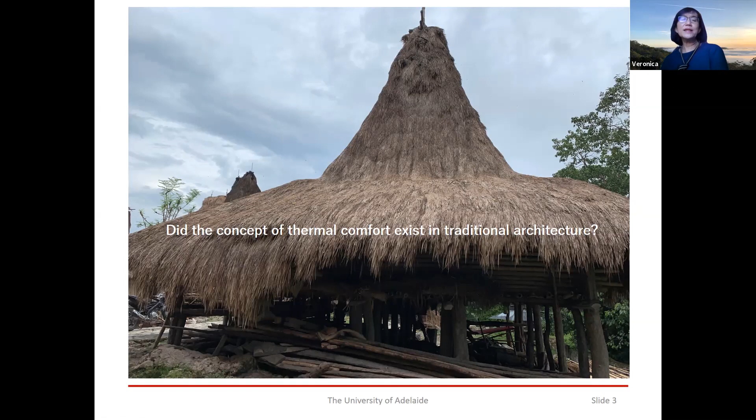Yes, yes. Yeah. So despite the fact that we often read that people who did vernacular architecture understand that, is that really the same understanding of thermal comfort that we understand now, or is it something else? For example, we know that in some traditional buildings, yes, they do build with very light material to probably allow the air to go through. But very often what we see is the windows are very small.

So, and then you go in there, and this was not my photo, but I remember last year I went to Flores and Sumba as well. And we went to some of the traditional houses, and inside the building actually is quite stuffy, sumpah.

And we do wonder, or I did wonder, how did they cope when they felt hot? And often what they do, they just go outside. They'd be in the shade, they just sit among plants and so on. So it's not often the case that the building would provide comfort as we know it now, because there are other ways for them to feel comfortable.

So the notion of thermal comfort that we know now, where a building has to provide this comfortable condition all the time, I don't think it's really the case. It may happen sometimes, but again, people don't necessarily live inside. They go outside. In some cases, yes, they have windows open to have the air go through, but it's not always the case. And you see that in many, many traditional buildings, even in Indonesia.

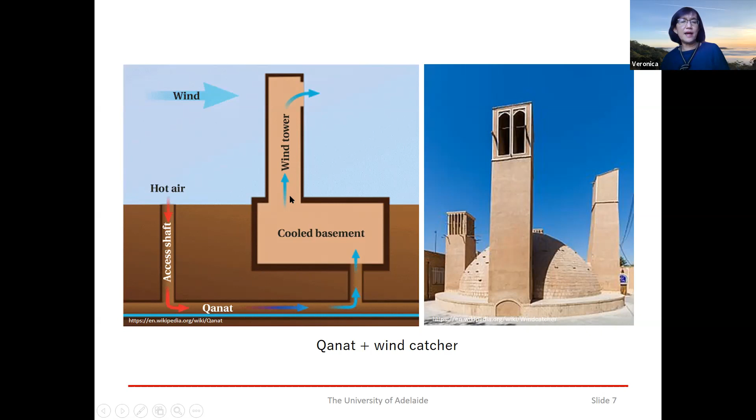They bring in the hot air, and then they put something like an evaporative pad, like a wet pad or wet mat. So then the air would go through this and bring cool air into the building. So yeah, some traditional buildings do that. But again, sometimes in areas that can get cool, they light a fire. So then the fire brings warmth to the people, and it brings so-called comfort to the people.

So in a way, there are several ways for us to be comfortable. Either we move to another place, like the photo that I mentioned before. Or we regulate the rate of our internal heat generation. So if you feel cold, then you drink a hot drink. Or if you feel warm, then you have cold drinks. Or we increase or decrease activities to regulate the rate of heat coming to the body, or regulate how much heat is lost to the surroundings.

So once again, we change clothing when we feel too hot. We take off our clothes, let the sweat on our skin evaporate, and then we feel cooler and so on. Or sometimes our body would contract, like when we feel cold, we become a bit tense. We increase the muscle tension to create this energy, the heat inside the body.

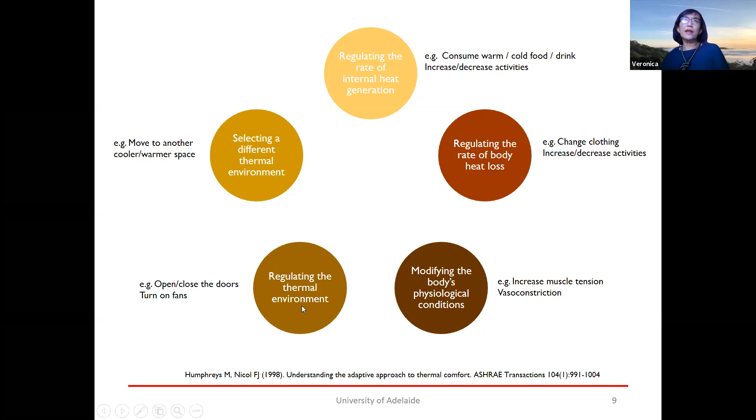However, the concept of thermal comfort as we use it now, which is providing a thermally comfortable condition in a building for the people all the time, really was a 20th century invention. It wasn't something that a traditional building would provide, this comfort 24 hours a day, 7 days a week.

Can anybody answer, when did the concept of thermal comfort, as we use it now, start? When did the demand for thermal comfort really start? Anybody want to answer that?

Anybody knows? Can take a guess? Yes? Who's answering that? Oh, Pak Sadili. Selamat pagi, Pak. When did it start? When do you think it started? Okay, to save time, I'm not going to wait any longer.

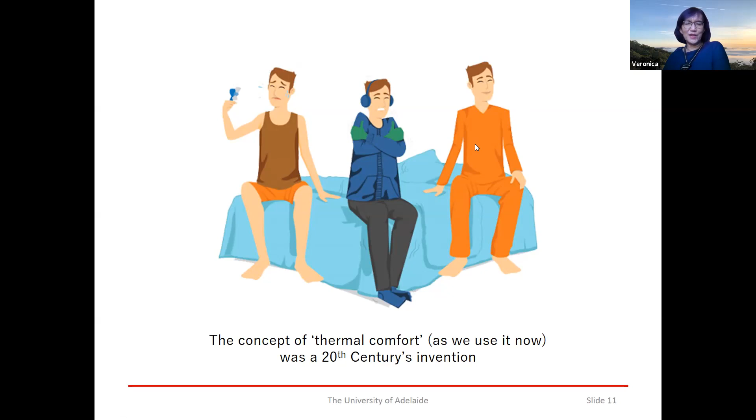So this thermal comfort, as defined by ASHRAE, or the American Society of Heating, Refrigerating, Air Conditioning, also by ANSI standard, the national standard, is basically understood as the condition of mind that expresses satisfaction with the thermal environment, and is often assessed by subjective evaluation. So subjective evaluation is, we said, oh, we're too hot or too cold or slightly cool or slightly warm. But it's a condition that we say we're satisfied with the thermal environment.

Whereas in a traditional building, people are probably not necessarily satisfied all the time, but they just go outside. They do something else to make them feel comfortable. So when did it actually start? It actually started by this guy back in 1902. So this is Willis Carrier. The notion of thermal comfort that we know now, that building has to provide a thermally comfortable condition for the occupants all the time, started off with the invention of air conditioning.

And it really began with a printing company. So this is really interesting. It's a printing company in New York. They found that the humidity in the Brooklyn plant ruined the color register on the ink. So the ink, when applied to the paper, misaligned. So it doesn't match with what they want to print because the humidity ruined the paper.

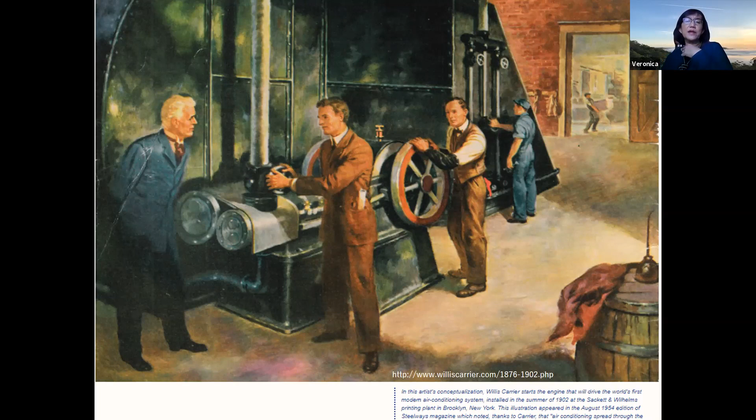So I'm not going to go through, of course, the big invention that he did, but basically it changed the world. It started off by affecting the printing company. This image shows that the printing got better once the factory got air conditioned. But that invention then started to spread very quickly. And this image, from Carrier's website, says air conditioning led directly to summer movie blockbusters as people came to cooled theaters to escape the heat.

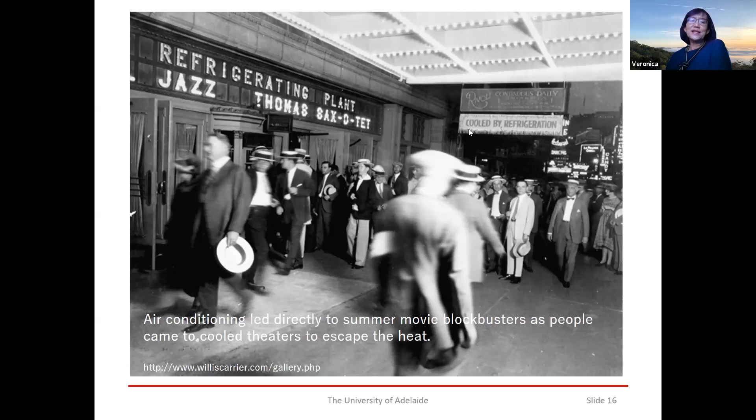So this is summer, but look, these people are wearing jackets and hats and coats because they're going to a refrigerating plant. It's like they're going to a refrigerator because it's so cold. And that's what people then demanded. So it says cooled by refrigeration. And since then, because we knew how to control the environment, we started demanding to be thermally comfortable inside the building, not just go outside. We need to be comfortable inside the building. So people demand to be thermally comfortable, and it has become a commodity.

However, although you can tell that I've got a cynical view about this air conditioning invention, Carrier developed something really, really important, what we now call the psychrometric chart. I'm not sure if those of you who learned building physics were exposed to the psychrometric chart. Basically, it's a chart that shows the relationship of things that relate to air: the dry bulb temperature, which is the temperature that we measure with a thermometer, the amount of humidity or moisture in the air, sometimes expressed as absolute humidity or relative humidity.

And often this is what we say a lot. Relative humidity in Indonesia is often between 70 to 100%. So 100% is a very humid condition. And so the lines here are the relative humidity lines. This is the line of the temperature. And bear with me why I show this, because this is going to lead to what we'll talk about later, building performance. So for example, what does it mean?

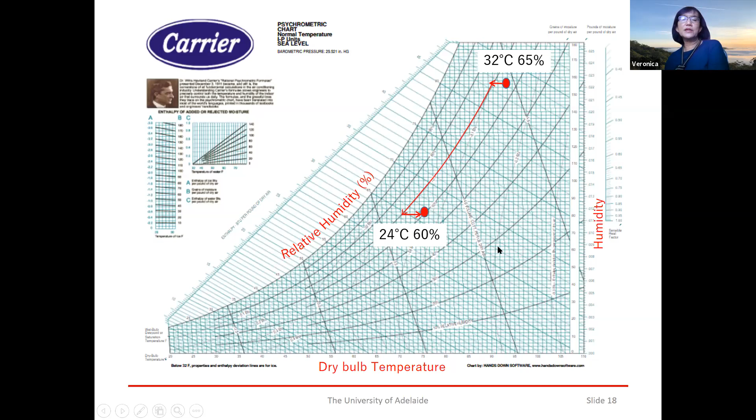So basically the principle is often, particularly in the hot humid climate, what we will do is we dehumidify the air, and at the same time, we do the sensible cooling. So the sensible cooling goes this way, horizontal, and then dehumidification goes this way. Or sometimes it goes this way. If you go this way, you increase the temperature, because going right is increasing the temperature, going left is decreasing the temperature. So just keep that in mind for a while and why I'm showing this.

Okay. Now let's wind 30 years later. There's a guy named Gagge who was interested in the relationship between human body and environment. And basically Gagge said that to maintain the internal body temperature of 37 degrees, what we do is we need to have the heat coming to the body, and the heat can be from our activity, or it could be from the food that we take.

So we create energy in our body, but at the same time, we also lose the heat. So we can lose it through our respiratory system. So when we breathe out air, we basically lose some heat. We also can lose body heat through our skin, when we're sweating, by evaporation, or simply if our body temperature is higher than the surrounding environment, then we lose the heat. But our body basically tries to balance this, and we need to maintain this condition.

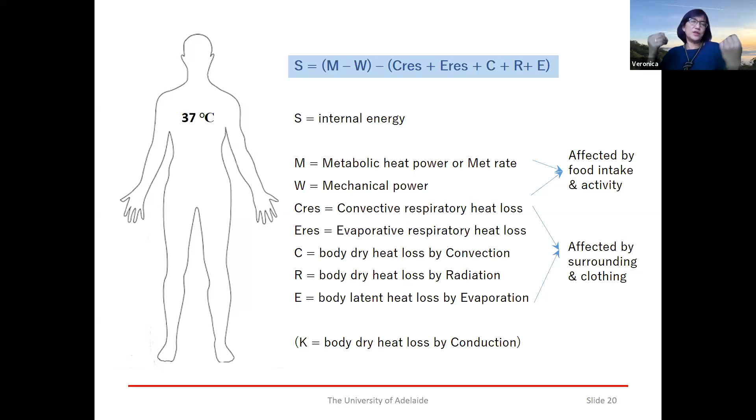So what happened is, these two, as I mentioned, are affected by food intake or activity, whereas these can be affected by our surrounding or our clothing. So when the surrounding is cooler than our body, we would lose heat. But if we don't want to lose that heat, let's say we are in a cool environment, then we put on a lot of clothing, right? So we reduce the heat loss.

What this says basically is these are the factors that affect thermal comfort. So our activity, our clothing, and then these four factors: temperature, humidity, radiant temperature, and air movement. For example, again, if it's warmer surrounding our body, we will have the heat coming into the body. And to make sure that we don't overheat our body, we release that heat through evaporation, through sweating, and so on.

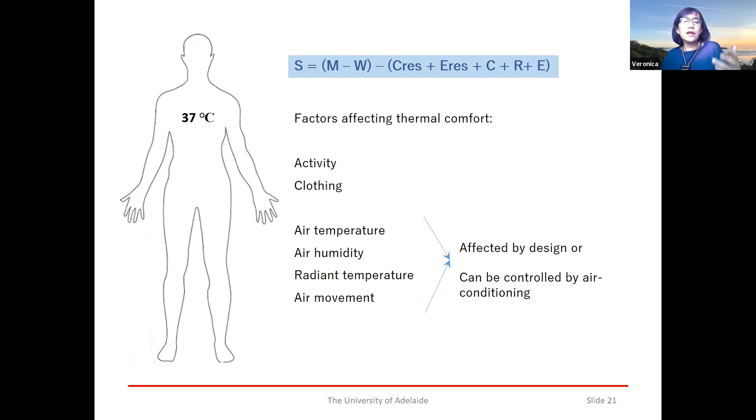As a designer, this is what we can do. We can't really control what people do in a building. We can't really control what people wear. It's up to them. But as a designer, we can affect this through our design, or in the case of Carrier, he created air conditioning to control the temperature.

Let's wind several years after, and I'm sure some of you are smiling looking at this photo. It's okay. Then this guy came along. His name is Fanger, or Povl Ole Fanger. He's a Danish scientist. And he was studying the relationship between the physical parameters of environment, as well as the physiological parameters of people, as well as perception and well-being. So what he did is he had 128 college students as participants, and he did a study in a climatic chamber where he can control the environment.

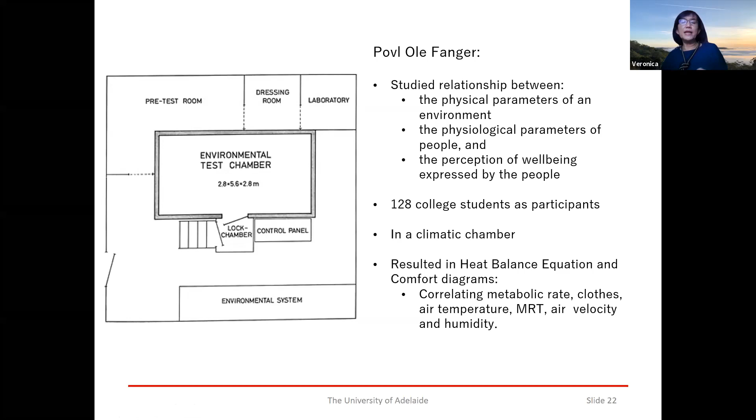And what he did was he varied all those parameters. He varied people's activity, clothing. He asked people to wear thick clothing to almost nothing at all. He varied the air temperature, humidity, radiant temperature, as well as the airspeed. And he basically asked people to answer questions such as, do you feel cold? Do you feel hot? Do you feel okay? And so on. And then he found out how to correlate all of these factors, which really becomes the standard now that we use in thermal comfort.

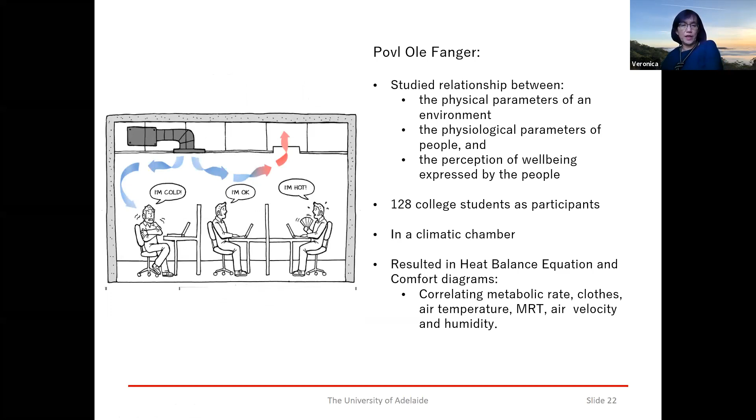One thing that he developed is something called PMV. PMV is predicted mean vote. Don't worry about the equation. I don't even do this myself because there is a program that can do it. But basically, what it says here is he found that people tend to prefer to be between slightly cool to slightly warm. So he asked questions on this scale from hot to cold.

And then this is what he called the neutral condition. And this is what the study found that people were after. So predicted mean vote is the prediction of how people are going to vote on this scale. And he found that between minus 0.5 to 0.5 is what people are after. The other thing that he developed is something called PPD, or percentage of people dissatisfied.

So whilst PMV is saying how cool or how hot they are, this is expressing how many % of people are dissatisfied in that condition. So as you can see here, this is the PMV vote on the bottom, and this is % of people dissatisfied. So as you can see, when people vote between minus 0.5 and 0.5, which is slightly cool to slightly warm, the percentage of people dissatisfied with that condition is only 10%. In other words, 90% of people are satisfied.

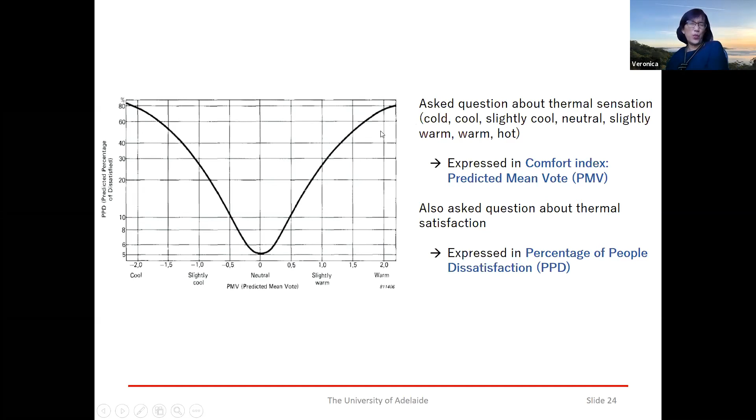And the further you go from the neutral condition, the more people feel dissatisfied. And he found that 80% of the population would be dissatisfied when they feel cool or warm. So that's pretty much what he found.

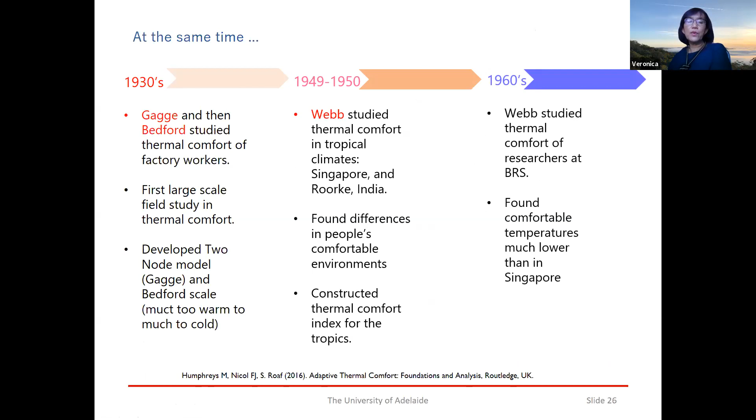However, at the same time, there were other studies. So for example, Webb looked at thermal comfort studies in the tropical climate and compared them with studies in other countries. He looked at studies in the UK and found that thermal comfort in Singapore or in India is quite different than thermal comfort in the UK. So this is the result that he found.

So on the left here are studies in England or the UK, okay? The English studies are right here. On the right-hand side here are studies in Roorkee, India, the plus signs, and in Baghdad, and this is Singapore. So these are all the hot climates, hot humid, and then the cold climate.

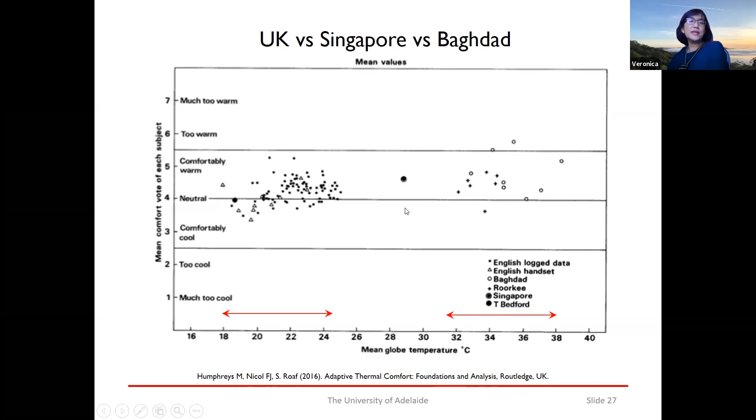Have a look at the range of temperature. So in England, this is the range of temperature that people feel acceptable when they feel neutral, or between comfortably warm and comfortably cool. In the tropics and the hot climates, look at the range of temperature, between 32 and 37. And in Singapore, it's about 29 degrees. So is thermal comfort universal? I don't think so.

So that study basically led to several more studies. Humphreys, for example, looked at what we call the adaptive feedback, and found that the outdoor temperature actually affects how we feel indoors. So when we expect it to be warmer, such as in the tropics or in a hot climate, we can actually accept a warmer condition. Whereas people in a cooler climate, or people in an air-conditioned building, if they expect to be in a cooler climate, tend to accept conditions at much lower temperatures.

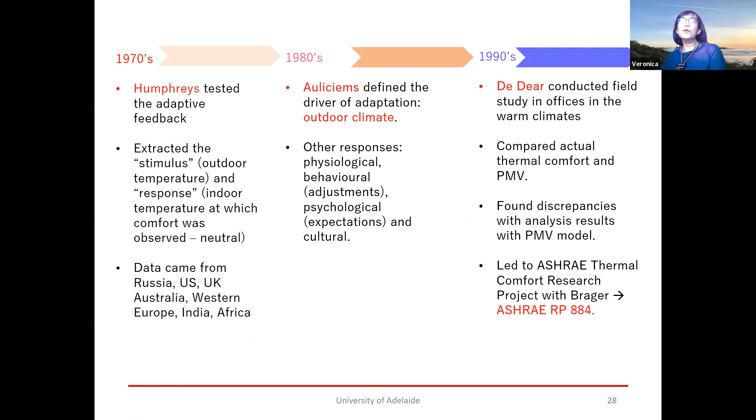Auliciems also found the same, and our researcher, my colleague in Sydney, or at the time he was in Queensland, Richard de Dear, did more studies looking at all the data, which led to what we call adaptive comfort. So what they found is something like this. If you look at the clear circles here, this is basically, again, the condition that people found to be neutral in non-free running buildings. Free running buildings are basically naturally ventilated buildings.

And have a look at this. So this is the result in naturally ventilated buildings, or buildings without air conditioning: when the outdoor is 10 degrees, people can accept temperatures as low as 16 degrees. And when the outdoor is 34 degrees, they can accept conditions up to 30 degrees.

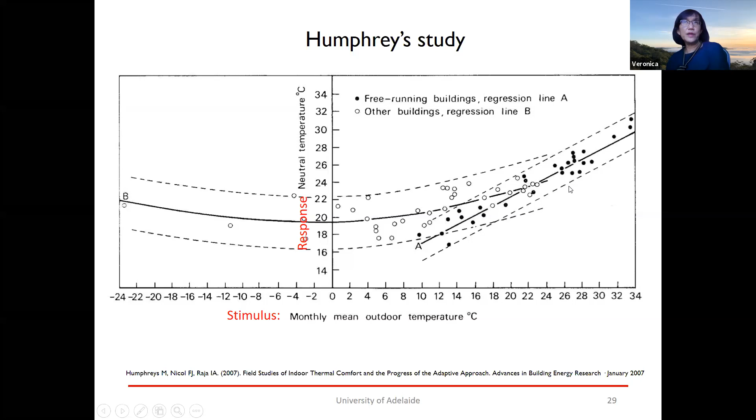Whereas if you are in an air-conditioned building, it stops here. The comfort stops at 24 degrees. Above that, people start to feel it's warm. It's not acceptable. And it's really interesting when you compare what they found comfortable indoors compared to the outdoors. So this is in an air-conditioned building.

Whether it's hot outside or cool outside, the range of comfortable temperature inside the building is only between 22.5 to 25 degrees, very narrow. In the naturally ventilated building, we can tolerate from even 20 degrees, but even less, 16 degrees to more than 27 degrees.

So that really says that there's two different standards that we can apply in buildings. One, if you are in an air conditioned building, which tends to reduce the range of acceptable temperature. And when you are not in an air conditioned building, you actually can tolerate more.

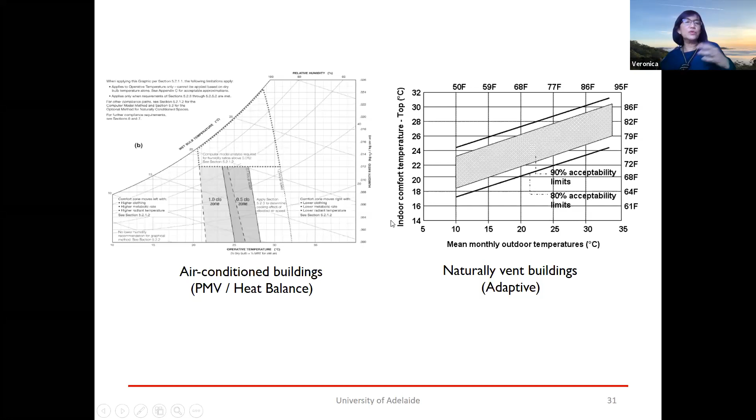So in the lecture last week, although we talked about socially sustainable architecture, in the context of sustainable architecture, I guess you know the answer, right? So if you're going to look at how we can make the building comfortable, then don't close it off, because if you close it off and put air conditioning, then people would expect to be in that condition. And when you are in that condition, you don't want to be too warm, and the building would use a lot more energy.

So in summary, thermal comfort really can vary between people, populations, groups, even older and younger can be different. And it varies between people in air conditioned and non air conditioned buildings, but really needs to be understood and assessed before you design a building for those people. So how can our design provide thermal comfort, and how can we assess this?

Now, this is going to get to the core of the lecture, and sorry to spend a lot of time before, but I think to give that context is very important. I'm going to start actually with the actual existing building first, and then we go back to the design and design process and using building performance modeling to do that.

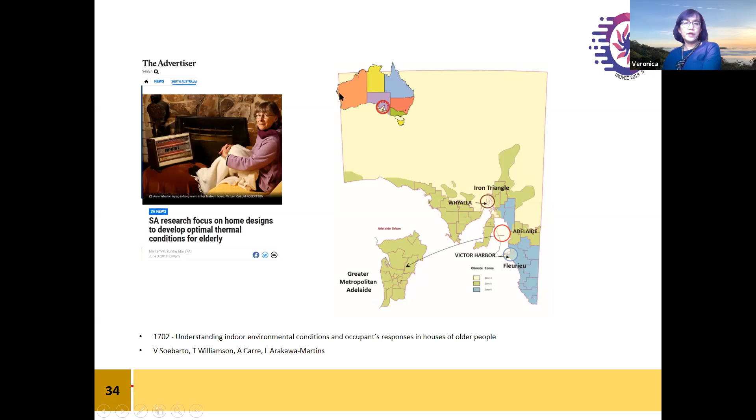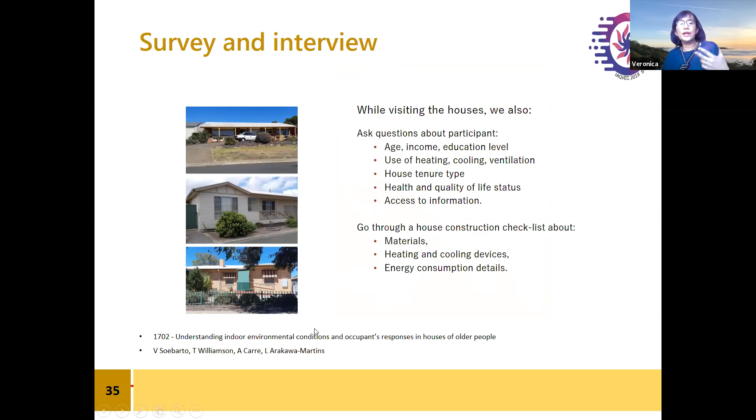Just an example. So we are just finishing a study looking at the thermal comfort of people over 65 years old in South Australia, where we go to the house, we do interviews, we did a little bit of what we talked about last week, looking at the social aspect of sustainable architecture, looking at their demographics and so on. But at the same time, we're also looking at the building design, heating, cooling devices, and so on. In the context of this lecture, it's relevant to show what we did.

So we did the thermal comfort survey basically. We developed our own data monitoring devices, and then people answer the questions about how they feel using this tablet. The tablet communicated with the data loggers, so we know at what condition they answer the question. So we know the temperature, humidity, airspeed, and radiant temperature at the time.

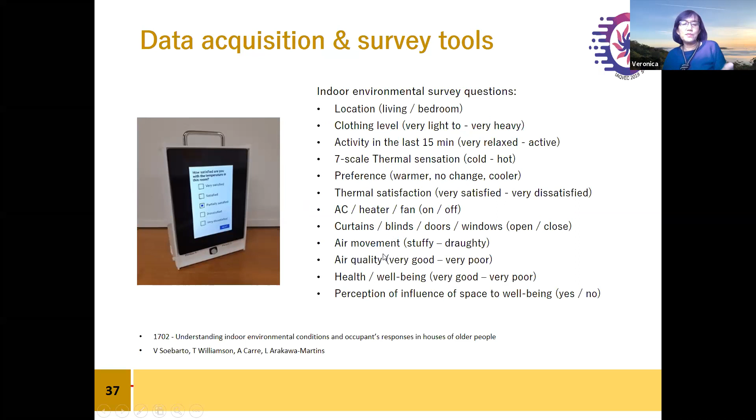And then we ask questions about what sort of clothing they are wearing, activity, their sensation, do they want to be cooler, warmer, and so on, whether they're satisfied or not, whether the air conditioning is running, curtains open, and so on and so forth. And we also ask about their health and well-being. So the benefit of doing the study is to really confirm what people experience.

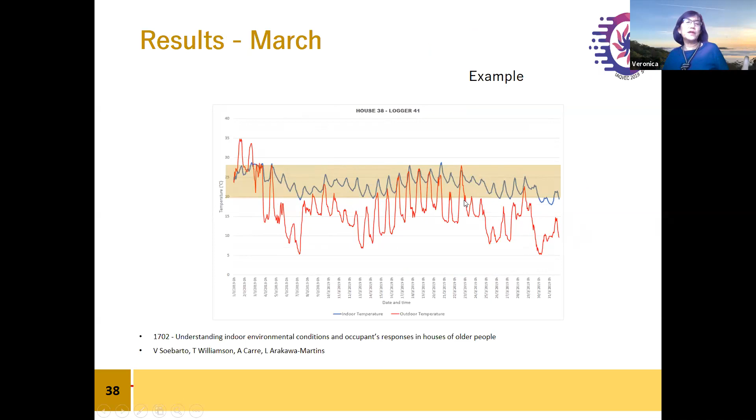So as you can see here, the red line is the outdoor temperature, and we found in this particular house, the temperature inside the house in March, which is a bit warm, is within that comfort boundary that we looked at before. So with this, we can also look at when they answered the question. So this is the temperature at the time they answered the question. We also can see when they answered the question.

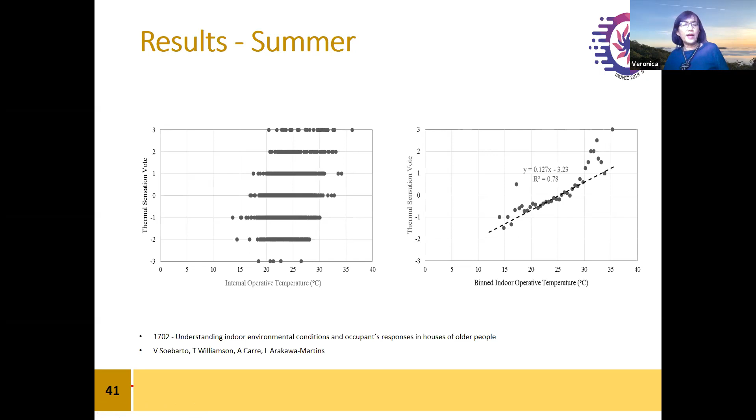So to represent the data, we can put that in the plot as we showed before, which is looking at the thermal comfort, and we can look at the range of conditions when it is inside or outside the thermal comfort zone, or we can use the adaptive model again to see that. So that's just one example of how we can assess.

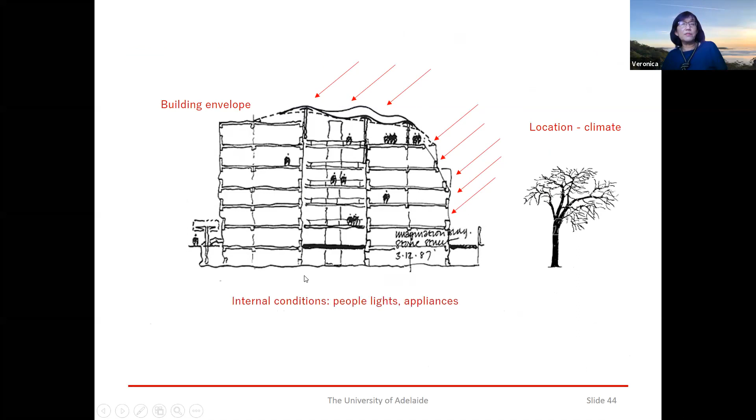But what happens in the new design? What can we do in the new design? All right. So very briefly, as you all know, a building is affected by many factors, right? The performance of the building, particularly in terms of its thermal performance, is affected by the location, where it is, the condition outside, the building envelope, what materials, what design you create in the building, and it is also affected by people inside the building.

In the context of hot climates, like in Indonesia, what happens is during a hot day or when the outside temperature is higher than inside, the heat will come through the windows, come through the wall, probably through radiation depending on the material of the wall. So the heat is absorbed and then radiates to the inside, and comes from the roof or the ceiling.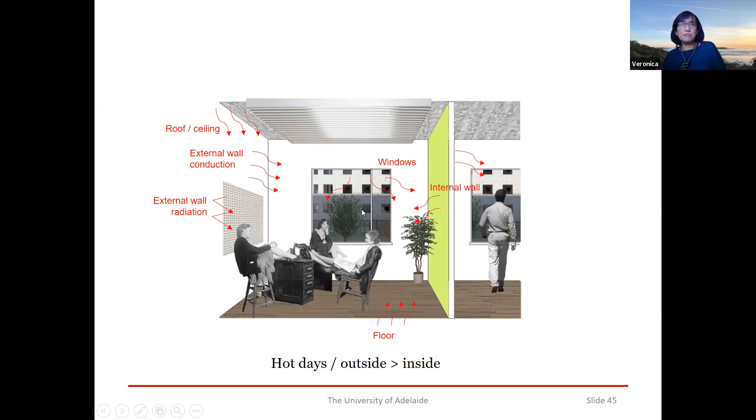And if the building is on stilts, raised from the ground, and the outdoor temperature is higher than indoor, you can also get heat coming from the floor. Very rarely, because the floor tends to be on the ground, it's cooler than the outside air, but sometimes this could happen. And of course, there are also heat exchanges between rooms, and people create heat, lighting and equipment create heat. So these are all the factors that we need to take care of if we need to modify the indoor condition to make it more acceptable to people.

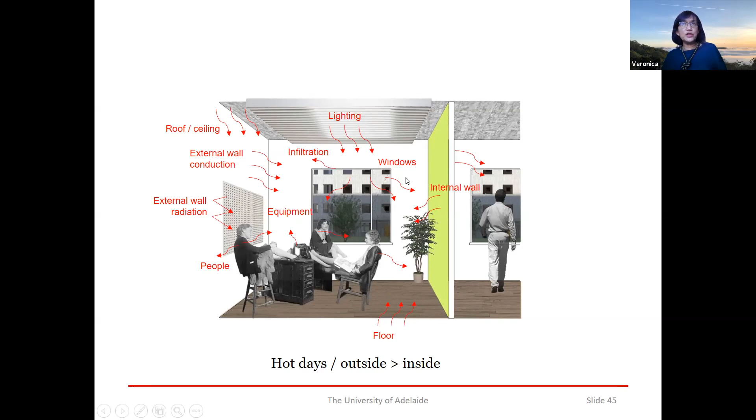And then there's also something called infiltration, which is heat that goes through leakage or cracks around windows, around doors, and so on. So in summary, that's the kind of thing that we're going to have to deal with. So all of this heat that comes to the building, as well as the latent heat, which is heat with moisture, with humidity, may increase the indoor condition beyond what we can tolerate. Okay, so we talked about the comfort range before. So all of this heat can increase the indoor temperature and humidity beyond what we can tolerate.

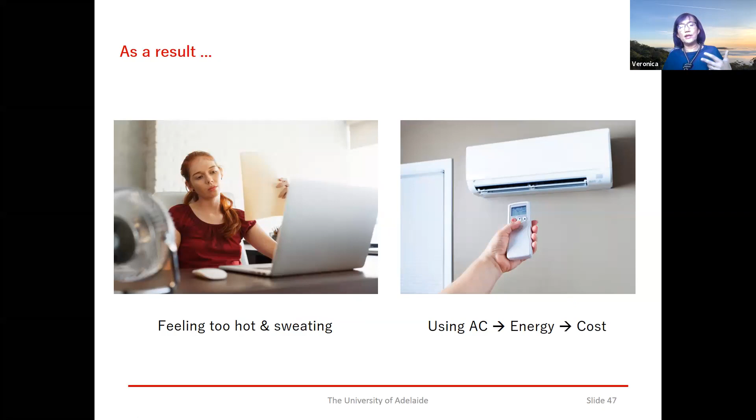So our job is then, how do we get rid of it? Because otherwise, either people feel too hot or sweating, or they would be forced to use the air conditioning. The problem is, as you know, when you use air conditioning, you use a lot of energy, and it also creates greenhouse gas emissions. And for the occupants, it also costs them money because they have to run the cooling system.

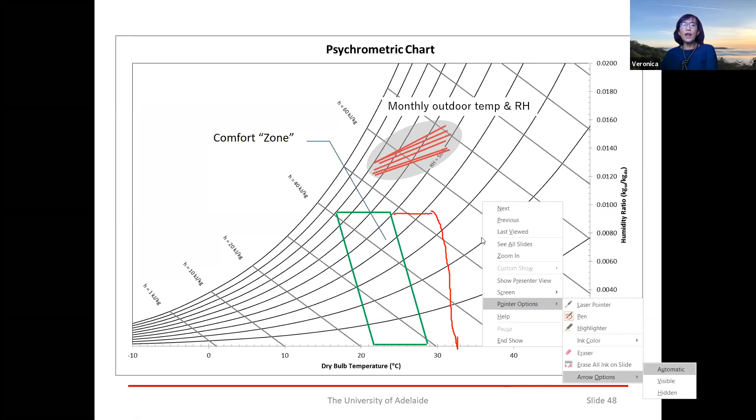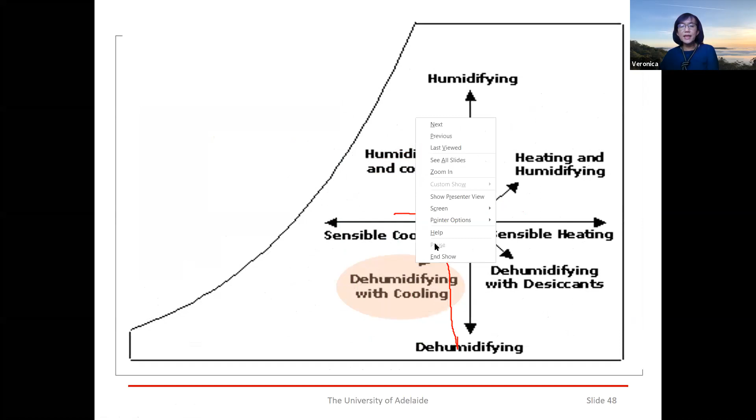Still, what happens here is we still need to bring that temperature down. And as you remember, this is what we call the cooling energy, because what we do is we need to dehumidify and cool the air. And that basically can use a lot of energy. Let me just delete that one. Okay.

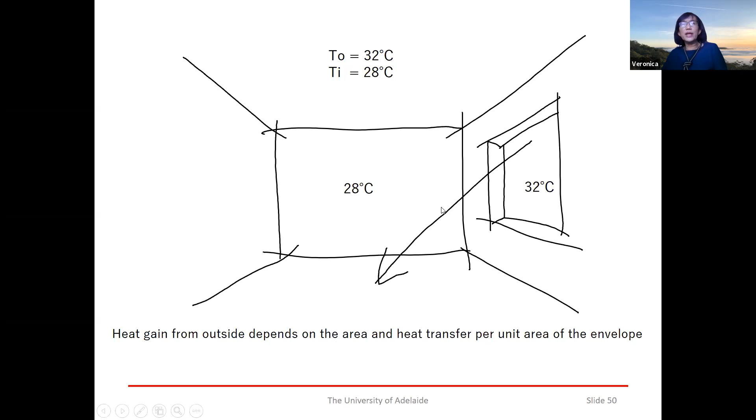Because, and I'm not sure if all of you have done this, basically how much heat will be gained from outside to inside really depends on the area, and the U value, which is called conductance, and depends on the temperature difference between outside and inside. So if the outside is much higher, of course there's a lot more heat coming to the building. If the outside temperature is the same as inside, there's no heat transfer, because heat only moves from higher temperature to lower temperature.

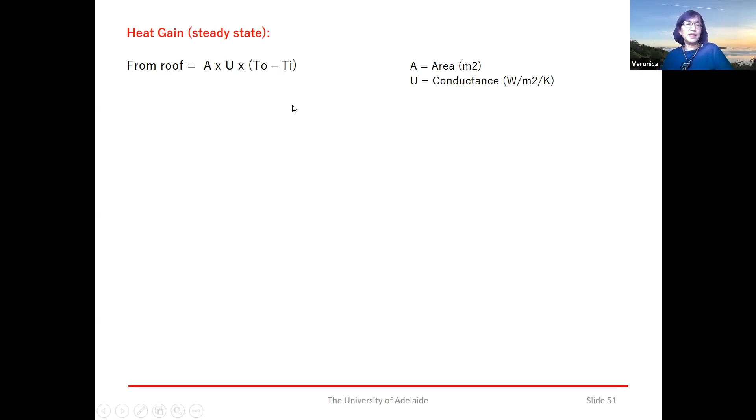So I think that's pretty clear, right? So basically all the heat that comes to the building really depends on the area of our building and the conductance factor and the temperature difference.

For glass, or windows, it's not just the heat that is being conducted, but also the transmittance or the transmissivity that the heat goes through the glass. So you also need to know the shading coefficient or solar heat gain coefficient of the glass. So this is in ratio. And then how much heat is outside, how many percentage the heat can come into the building, and the area of the glass would determine how much heat goes into the building.

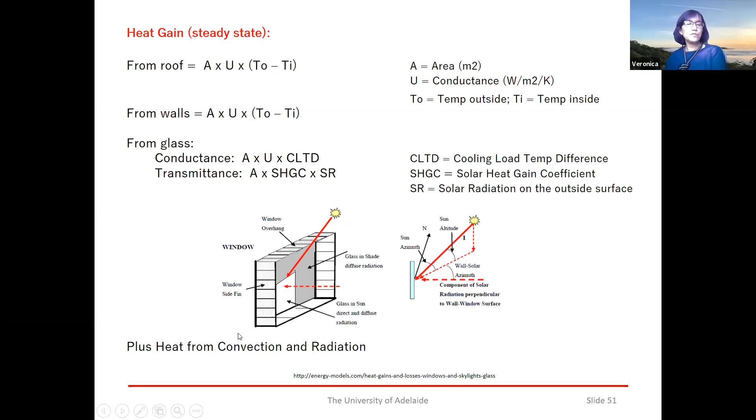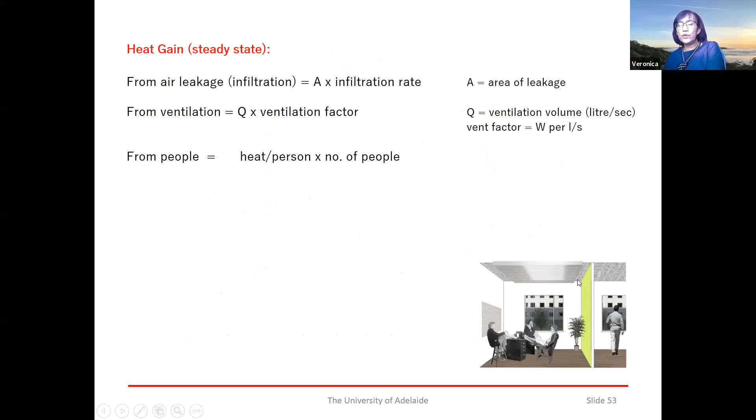And also once the heat goes to the building, it also radiates out, or the air is circulated by convection. All of these need to be taken care of, okay? Oh, sorry, before that, as I mentioned before, there's also heat coming through openings like this, or cracks, people, lighting, equipment.

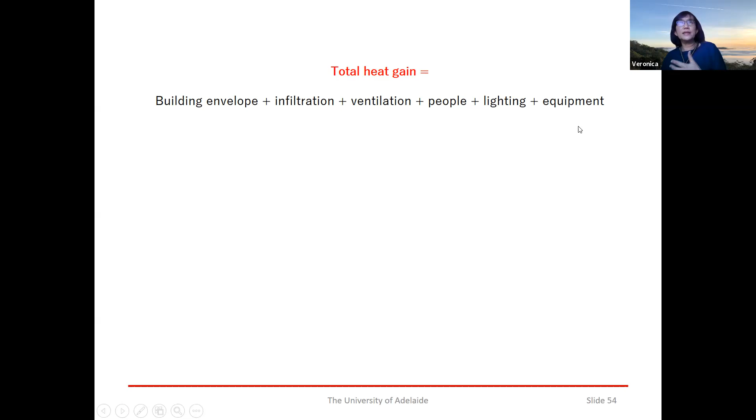So what happened here is how much heat needs to be taken care of, whether it's by opening windows or through air conditioning, really depends on the total heat that comes from the building envelope, infiltration, ventilation, people, lights, and equipment. All of these become what we call cooling load. So if you are using air conditioning, this determines the size of your air conditioning system.

So the size of the air conditioning system really depends on how much heat needs to be removed. And how much heat needs to be removed depends on the building materials, the design, the openings, people, lights, equipment. This cooling load, if you look at it over time, then becomes what we call energy.

Okay, so for every hour, and you multiply it by 8,760 hours a year, you get the total cooling load, and how much energy is needed depends on the efficiency of the cooling system. So if you divide the cooling load by the efficiency of the cooling system, you get the cooling energy.

And if you're concerned about the environment, this cooling energy can also be translated into greenhouse gas emission by knowing the greenhouse gas emission equivalent for 1 kilowatt hour of electricity. And if you're interested in the cost, once you know the cooling energy, you can multiply by the electricity cost, and you know how much money your client will spend for making the building cool.

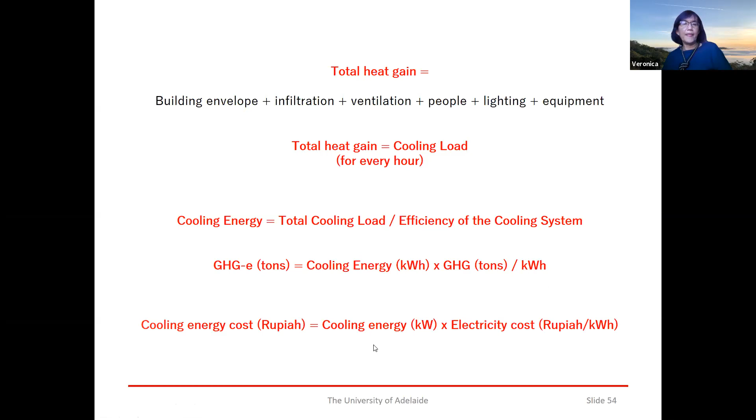So the point that I want to make here is, particularly these 4 aspects, these are what we as designers can control. We design the building, we determine the area, the size, the dimensions, we determine the materials, we determine whether there are cracks or not through our detailing of all the building construction. The way we open windows will determine how much heat comes from ventilation, and we also determine how much lighting will be needed in the building.

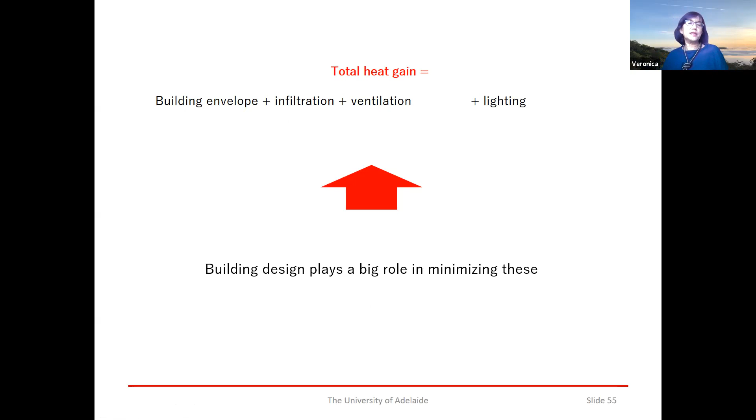If you design a building that doesn't have many windows or openings, then even during the day, people will turn on the lights. And when you turn on the light, you bring in heat from the lights, it increases your air conditioning load. So building design plays a big role in this.

So what does this have to do with thermal comfort? Well, if you remember that equation that I showed you before in terms of how much heat comes to the building, this depends on the area and the materials that you use. But have a look at the one on the right here. This indoor temperature is what we take as the condition that the occupants consider thermally comfortable.

So if occupants can accept a higher temperature, 27 degrees, the temperature difference between outside and indoor is less, and therefore the heat gain is less, therefore your cooling energy is less, therefore the building would use less energy, pay less money. But if we expect this to be really low, because people like to be freezing in the building, then obviously the temperature difference is higher, and your energy needed to cool the building becomes higher. So the understanding of thermal comfort does affect how much energy a building will need.

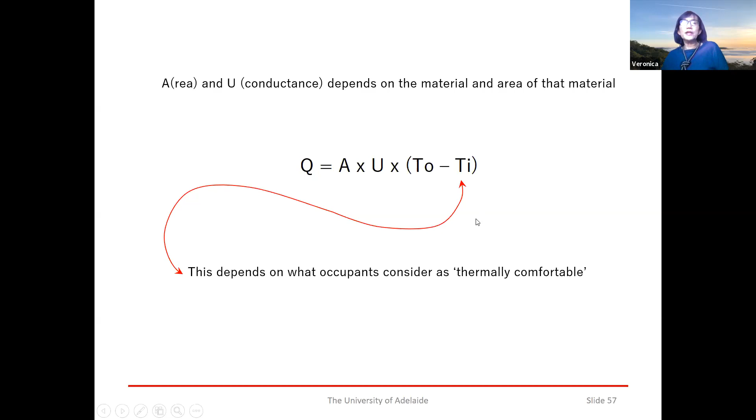Of course, we're not going to be able to force people to increase or widen the range of temperature that they can tolerate. But we can design a building in such a way that people have more connection with outside, that they don't expect to be in this ice box all the time. So remember we talked last week about the social aspect of sustainable architecture. One of the aspects is about well-being, about relationship with outdoors.

So if you can design a building in a way that people can have better correlation with the outdoors, I think it will affect how much energy is needed to cool the building, because the expectation is different than if you put people in an icebox building.

So having said that, back to the main core of this lecture. How do we then assess our building design so it will provide thermal comfort to the occupants? Well, you can do what I showed you before in terms of doing the calculation. You can do it by hand, but of course it takes a lot of time.

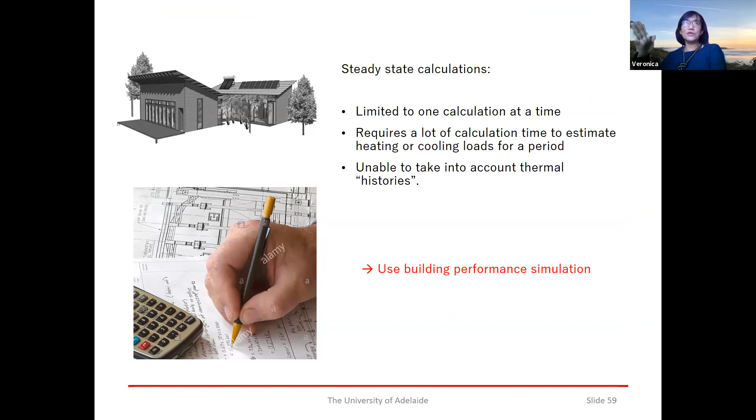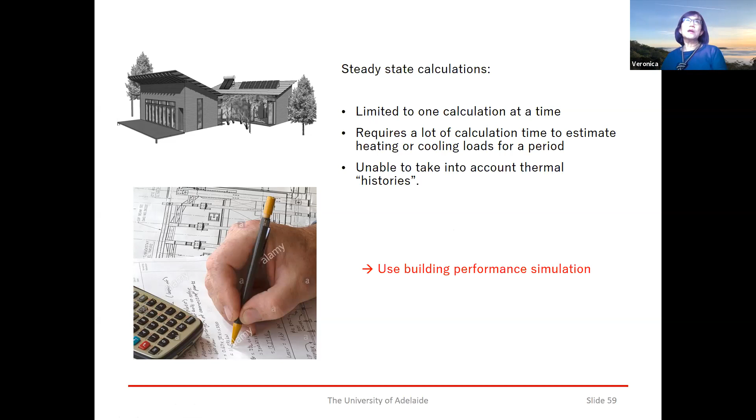Because if you think about the whole year, there's 8,760 hours, which means you have to do this calculation 8,000 more times. But also with hand calculations it is very hard to take into account the thermal histories. You know, the heat will be absorbed, radiated out, or convected around the rooms and so on. So many years ago, I think more than 60 years ago now, some scientists found that you could do it through what we call building performance simulation.

So what is building performance simulation? It's basically a computerized tool which, by using numerical methods, can find solutions to a realistic model of the complexity in the real world.

So you simulate a building, you put it in a real location, and then you put it in the real time frame, and then using the basic methods or basic calculations, some of which I showed you before with this steady state calculation. Of course, complex building performance simulation is more complex than what I showed you, but hopefully you got the gist of it, the basic principle of it.

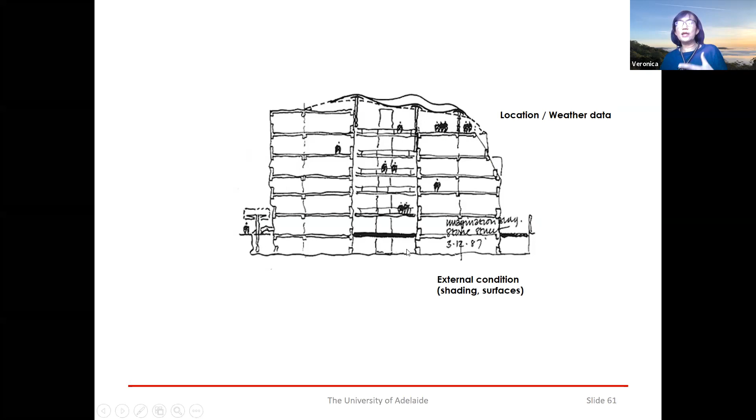So by doing this calculation, the building simulation can predict the impact of outdoor, the impact of external shading, maybe ground surfaces, the impact of building envelope data, the impact of people, lights, equipment, and so on. And also, if you use a cooling system, then it can also predict the energy use. So with building simulation, you can look at the solar access, solar radiation.

You can predict the indoor comfort because the simulation can calculate all the heat exchanges that happen around the building or on the building envelope. What would be the temperature inside the building? What would be the humidity? What would be the airflow? It also can calculate the PMV that I showed you before. It could calculate the percentage of hours when people are feeling comfortable or not comfortable without air conditioning.

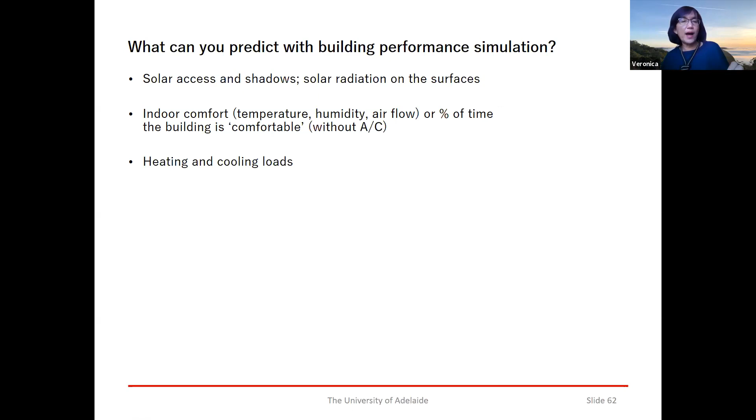Or if you want to have air conditioning, it will calculate how much load. Remember, we talked about heat gain being the same as cooling load. Then it can calculate the energy consumption, the cost, and the size of equipment. And then other things such as daylighting, maybe water usage, maybe solar water, and also embodied energy or materials, which is outside the context of this lecture, basically energy that is used to make the building. And if you're interested in creating electricity from photovoltaic cells, simulation can also do it.

Before I show you the simulation itself, basically the simulation can be used in two modes. One is in a building without air conditioning, or when you turn off the air conditioning, you really want to see how comfortable the building is without it. Because if you turn on the air conditioning, of course it would be comfortable because you set it to the temperature that you want. But the beauty of the simulation is you can do it for what we call free running, because then it can predict various indoor comfort parameters.

Or if you want to test how much energy is needed when you use cooling, then you set it so that you close all the windows and say, okay, now I'm turning on the air conditioning. It will calculate the energy for you.

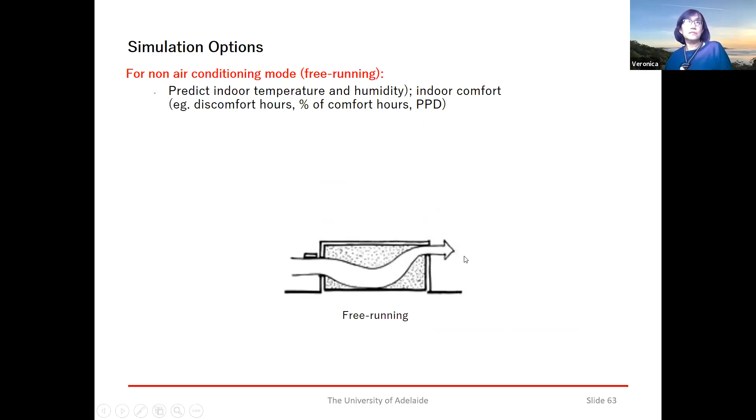I think for architecture students, I always say to my students, always try to turn off the air conditioning to see how good the design is. This is what I always tell my students, but then if they want to test just to look at the energy, they can do it. So basically what you do is you put all the parameters. Then once you have all the input parameters, it's just a matter of clicking the button, execute the simulation, and you got the result, whatever result you want to examine.

And then obviously you're gonna say, oh, is it comfortable? Nah, it's not. So how do you change it? Well, let's say if the building is too hot, then you said, oh, let's see what happens if I change the orientation. So you just click and change the orientation. Or you said, oh, I'm gonna add more shading. I put more eaves or overhangs. So you just redraw the building, extend it, and see the impact of that. Or you can change the building materials, or you can reduce the window size, or make it wider, bigger, and so on.

So there are so many building simulation programs. If you want to know how many and what they are, this is the database for all simulation programs in the world. So you can go to this and go through all the programs that you want to use. I personally use, or we teach here, several programs. We teach a program called Design Builder, which runs the EnergyPlus simulation engine. We teach IES, which is Integrated Environmental Solutions. That's a UK-based program. And lately, we've been using Rhino Grasshopper, and we use Ladybug and Honeybee as a simulation engine. So that's one way of doing that. But there's many other programs that you might want to have a look at.

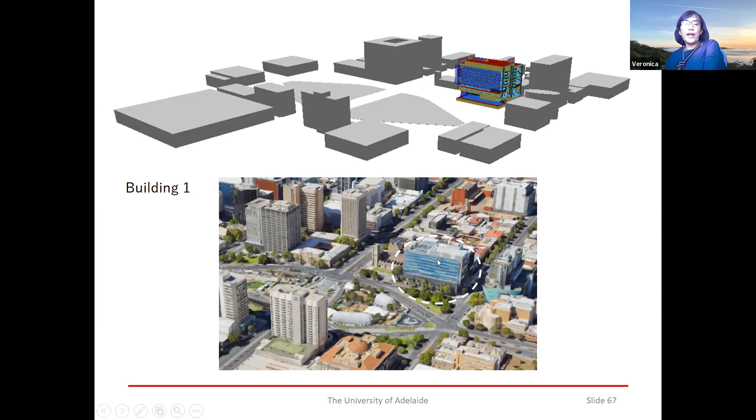And these are some of the examples that we did. So in this case, this is a simulation of an existing building. In this case, we're not looking at thermal comfort, but I just want to show you. This is an existing building in Adelaide. That's the model. As you can see, you model the surrounding buildings, and then you enter all the parameters of this building to reflect what actually happened in the building. And then there's another building here, which is, oh, sorry, here, in the white. And then the third one is this building that we simulated.

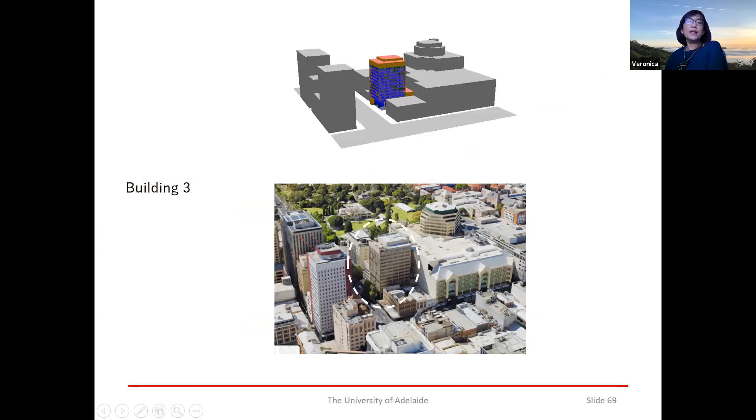And then what we did in this simulation is looking at the impact of urban heat in terms of its energy use. So what happens if the actual temperature increases due to global warming, or there's a period of heat wave, how much greenhouse gas emission from the building would increase. So that's one way of doing simulation.

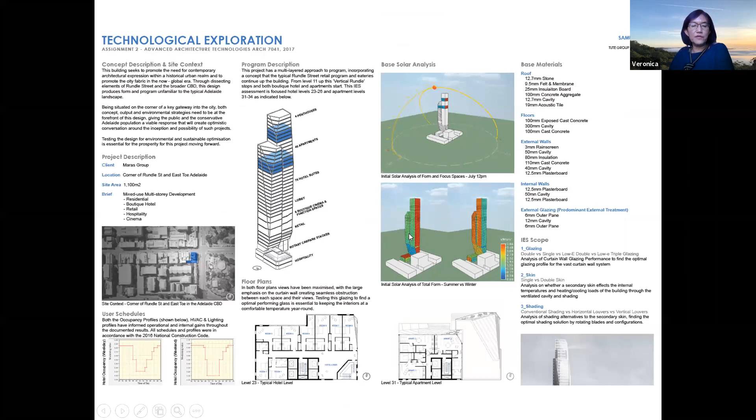This one is, again, from some of our architecture students. In this case, this is their design project. As part of the design project, they have to demonstrate that the building meets the comfort criteria. In this case, they use the program called IES. As you can see, you can look at shading impact and how much heat is received on the surfaces. And then what they did is looking at, once again, the indoor temperature versus outdoor.

So as you can see, this is actually in the warmer period. The temperature is very, very high when the building is just using normal glazing. And what the student did is start looking at other strategies. So when you incorporate opening windows, changing the window glass, and so on, the temperatures start to reduce. So this is the original or the initial design, and you can see the temperature drop here.

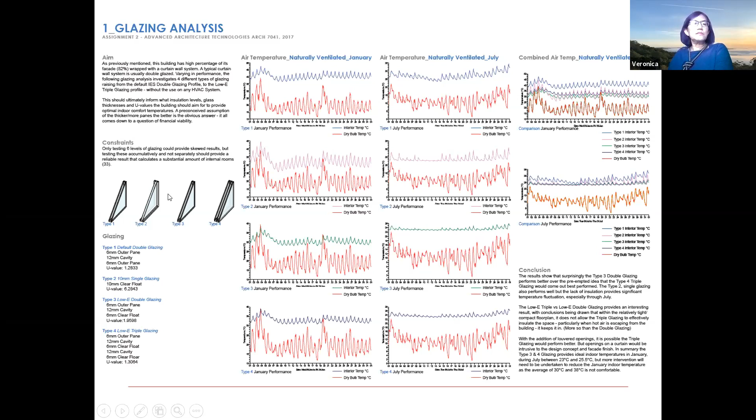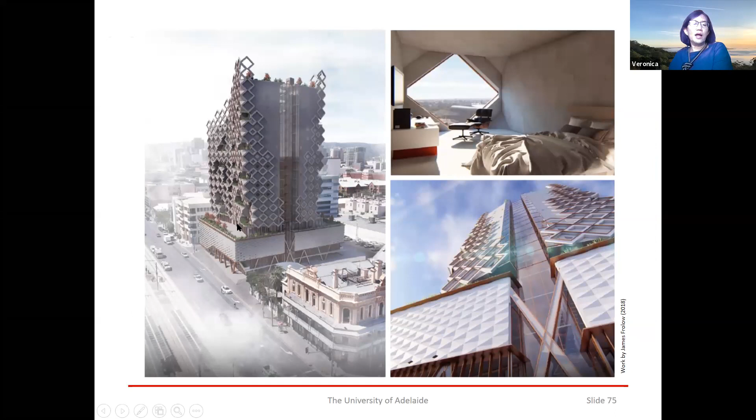These are other projects again. So looking at this mixed use building, this student was interested to see the impact of different kinds of shading outside the window. So first, of course, like your design, you're looking at more basic principles, and then he started doing simulation.

But then he also looked at what happens if these windows are actually openable. And you can see once you open the window, the temperature drops quite significantly because you bring in fresh air. What it means is the building is not going to use too much energy because you let people open a window, it brings the temperature down, and people feel more comfortable.

And if you do need to run the air conditioning, it's only during this period. So then they can say, okay, I will only turn on the air conditioning between 12 to 4 o'clock just to bring the temperature down. But apart from that, you can just let the temperature float.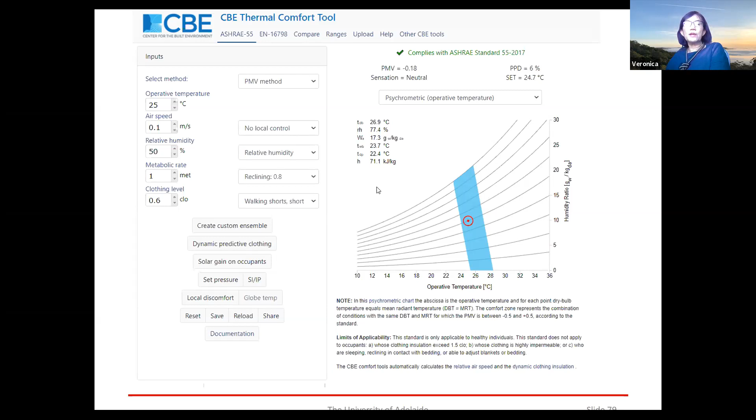So when the temperature is higher, and this is using the PMV method, the heat balance method, and also if you increase the humidity, you can see that's probably not very comfortable. It says here, do not comply. But if you are interested in the non-air conditioned building, you can use the same tool, and instead of using the PMV, you use the adaptive method.

Now you can also see, if you go to 29, people are still okay with that temperature, even if the outdoor is higher. And you could say, okay, if I can make the building have 30 degrees maximum, then the building is good enough. So what do you do if it doesn't? Well, you go back to the design and you make improvements.

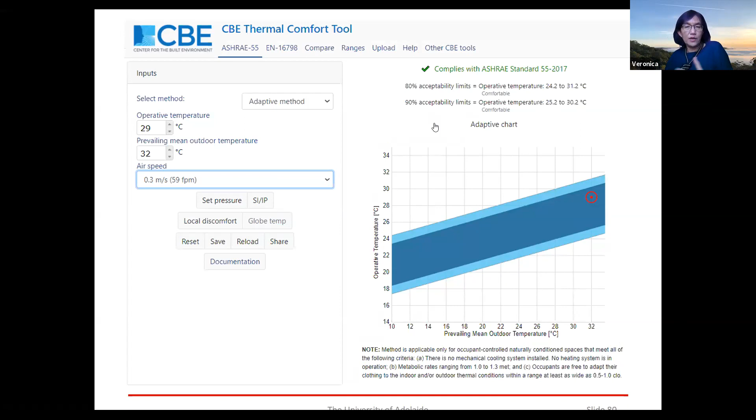What you can also do in this tool is upload a file that has the hourly temperature. So instead of using just one point, you can grab the result from the simulation and dump it here, and it will give you all the dots of the indoor temperature, and you can assess whether the building is comfortable or not.

Okay, so in the last 3 minutes, in summary, as you can tell now, building performance depends on the building design, the envelope, the materials, the dimensions, orientation, shading, and so on. And it also depends on the expected indoor conditions or the thermal comfort limits that we talked about before. And it is influenced by the outdoor conditions.

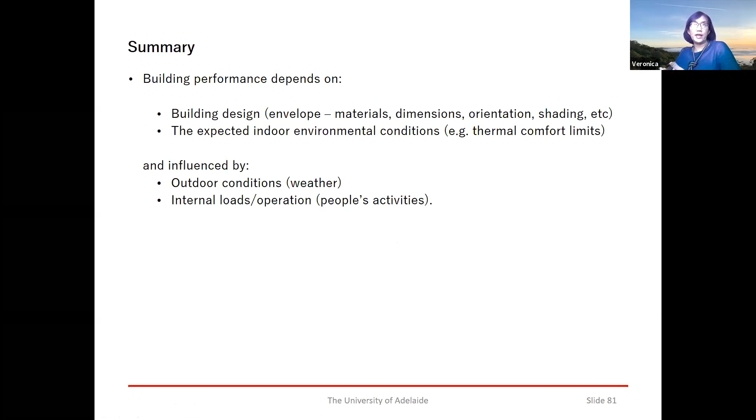Also, it is influenced by people's activities, because we, as the occupants of buildings, generate heat. Our activities generate heat. It affects comfort. So to assess your building design, I would suggest you use building simulation, because then you can understand the impact of the surrounding environment and building envelope on the indoor environment. You can test different strategies on the building and look at the comfort inside the building.

You can also, in a way, look at the indoor temperature, humidity, thermal comfort, percent of comfortable hours or non-comfortable hours. But again, if the building does need air conditioning, you can predict how much energy the building will need. And so to minimize it, obviously, you can go back to the design, you can do other things to minimize that heat gain, therefore reducing energy in the building.

And the process, once you've got the model, is very quick. You can run hundreds and hundreds of simulations. It should not be too hard. However, just remember, when you use building simulation, simulation can never replace reality. There are always assumptions that you make, because building simulation can't do everything. It also relies on the accuracy of the program itself, and also your skills in using the simulation.

So you need to be well trained, because it's very easy to make a mistake, because it's just putting numbers, right? If you just want to look good, let's just say you use building materials that conduct very little heat. Whether or not that material exists, you can make it up basically. But if it doesn't exist, then what's the point? So really just be careful when you simulate, because if you put garbage in, you get garbage out. What it means is if you put the wrong input, you get the wrong output.

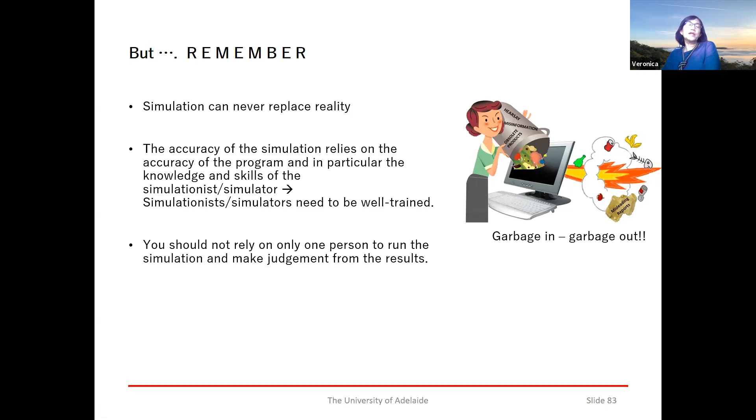So if you are using simulation for a real project, I also suggest that you have another person look at your simulation model to make sure you don't make silly mistakes. My suggestion is we need to incorporate assessing building design during the design process, so it's not too late. Because if you don't pay attention to maintaining acceptable conditions in the building, there could be two

And the second one, of course, if your building is too hot, then the likelihood of people using air conditioning is greater. And what happens is we just keep increasing our greenhouse gas emissions. And I believe we don't want that to happen.

So that's it from me. If there's any question, I'll be happy to answer. I don't know if that's what you expected, Ova, but maybe I went too far on the thermal comfort bit, but I think it's important to give the basic understanding before we go to the actual simulation.

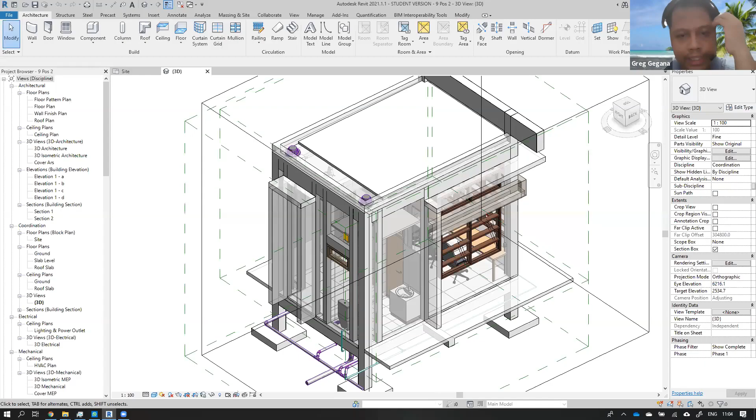Well, this is one of the exercises that students did. Basically, in BIM software, we can put a lot of information, such as what you talked about before, like the sun position, location, and also the function of the building that determines the people, activity, heat gain, and so on, and also the material.

Actually, I have a question for you, since you've already tried many simulation softwares. I'm interested in interoperability between the software, especially between those simulation softwares and BIM design authoring software like Revit. How is the workflow if we do it? Very good question. And I have to say that is a problem that has been going on since I started doing simulation back in the 90s.

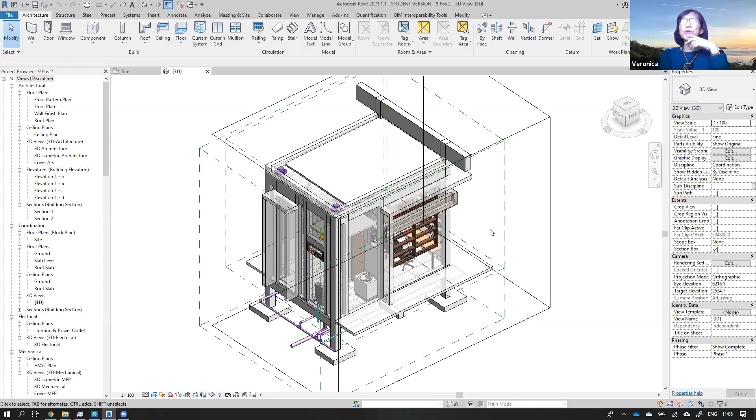The issue is, BIM is supposed to be the link, the core of this, right? Yes. And I think in Revit you could also use, what's it called? Actually, I usually use the internal engine for thermal load analysis, and also Insight 360. Right. So if you just use that within Revit, I think it's great, because then you don't really have to go out of Revit.

The issue often is, in practice, a lot of detailed environmental simulation is done by specialized companies, and they don't use that program. Exactly, because Revit is not intended to be an environmental simulation tool. So although it can do environmental simulation, it has limitations. As a result, people use Revit to model the building and then transfer the model into, say, DesignBuilder or IES. They create the IDF file or gbXML file, and then it is read by another program.

The problem is, when you think about thermal simulation, it almost doesn't matter. Let's say you've got a window. Let me just use a piece of paper like this, okay? So if you have a window here on this side. Maybe the paper shouldn't be white, Prof. Let me just see. Okay, there you go.

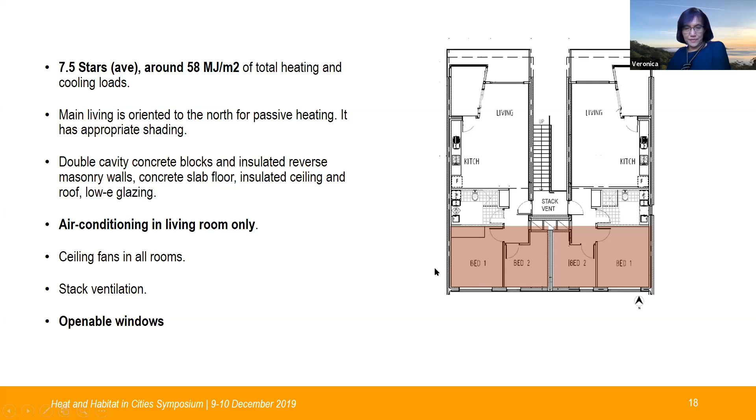So we monitored the house and we talked to the people, and this is low income housing. So some people said, well, when it's too hot and I don't want to pay for the electricity, I just go to the shopping mall. I just stay in the mall until night and then go home because I can't open the window. So I'm not sure whether the simulation was wrong, meaning that they did not check with the architect how much the window can be open, or when it's built, they put the wrong window.

I'm not sure. I was told also that in the building code, when you live upstairs, the windows should not open more than 10 centimeters because people might jump out. Duh. But this is not even 10 centimeters, that's 5 centimeters. That's it. And there are no other openable windows.

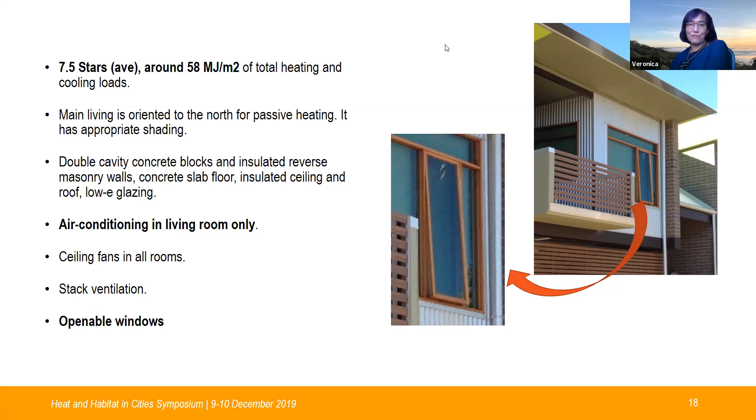So yes, the building was built according to what was planned, except the way the window is designed or built is not according to what the simulation was done, or vice versa. Or the simulation didn't know that the window can't be open that much. So then it looked like it was good. And then we monitored the house. Oh, sorry, let me just continue to share the screen. And then we recorded the temperature in the building.

So did you go to the architecture school, Tria, or building and property? So I did the Master of Design, Innovation, and Technology. It's in the School of Design at RMIT. Oh, okay, fantastic. And I took one sustainability class, so I cross-studied into environment and building. And okay, so who was teaching you? I forgot his name. Trevor? Yes, I guess this is the one. He's still young, likes cycling. I barely remember him, but he told us what you just told us about green buildings and stuff. But yeah, it was nice to see you.

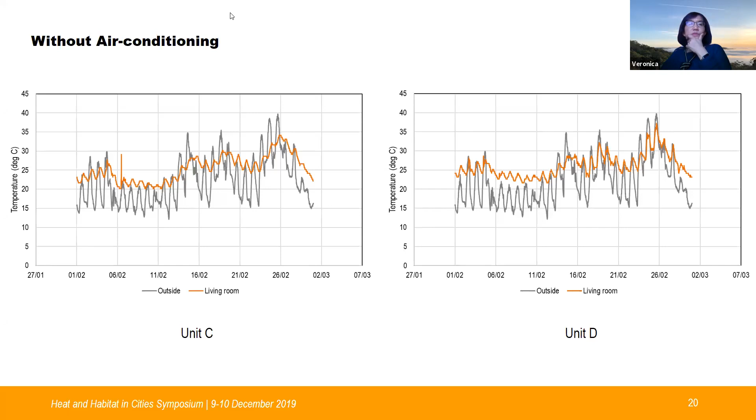Is somebody doing something so I can draw? Or are you trying to draw something? Let me just see. How come I don't see the annotate? Oh, maybe I should share a screen. Where is the annotate? How come I can't find my annotate screen? I'm just gonna stop. Can you find an annotate? I can't see annotate. I'm sorry, I was trying to draw, but I cannot see the annotate button on your screen. So let me just add something else here. Okay, not this one, hang on. Okay, so let me share a screen. So what I'm trying to say is, if you want to draw, can I draw? Let me just see, why is it not?

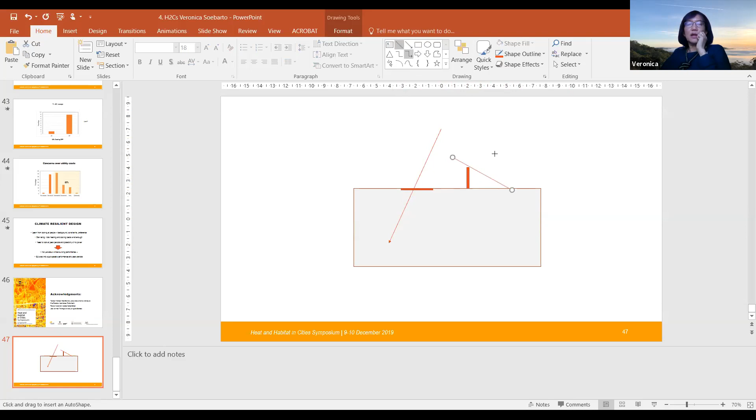Okay, so what I'm trying to say is, if you have a building, let's say this is your building. So if you want to put a skylight, for example, my suggestion is in the tropics, never put a skylight that's facing like that, because what happens is you just bring in direct sun here. So I think the way you do it in the tropics is, I suppose you put a window there, and there should probably be a roof, or maybe shading like this, whatever it is. But let's say just the roof.

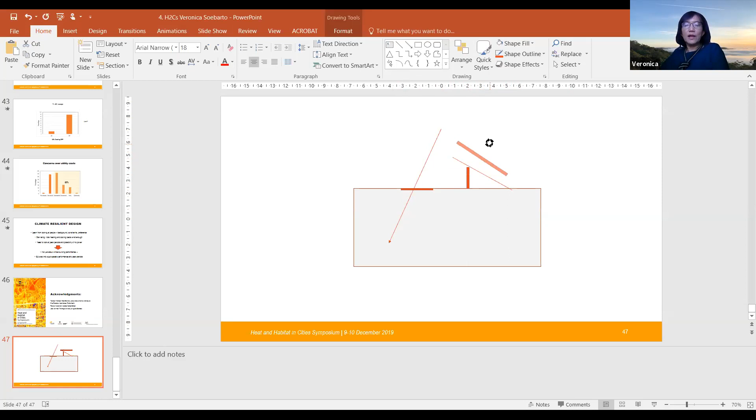So then, oh, sorry, I'm just gonna use this quickly. All right, there you go. So then what happens is you've got sun coming here, but hopefully that would be blocked by this roof, maybe like that. All right, so the skylight now is vertical, you don't get direct sun, then you get daylight rather than sunlight. Whereas if you get it like this, there's sunlight.

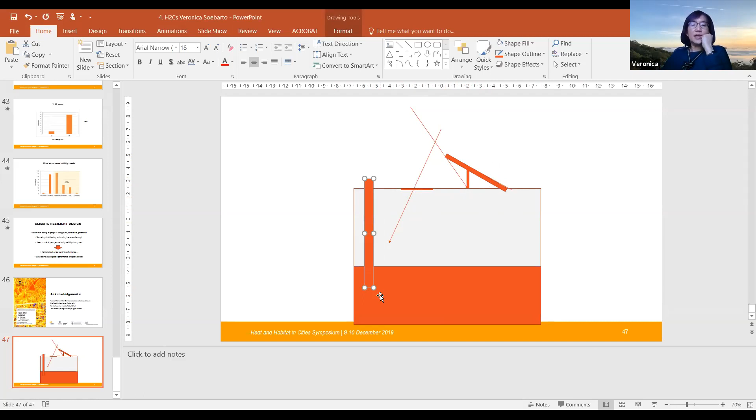But again, as I said, if you have a building, say a ground floor, and there is no way you can have a window here, then maybe, yes, you can put a sort of light tube here. That probably would work. But as long as you can have windows, I would suggest you use windows. Okay.

All right, any other question? Okay. Is that clear, Tika? The answer?

Prof. Ira, I just want to continue from Tika's questions. What if this light tube or light well is being applied in very densely populated houses? So they don't even have a vertical wall. They're just side by side with other houses.

Sure. I think in that case, if that's the only way you can get light to the room, you probably just have to do that. Or maybe, there's of course several ways of doing it. You could have, I don't know, are you talking about a two-story building or just even a one-story building? Yeah, even a one-story building. I think if you're in a dense situation, it's very hard.

And I have to say also in terms of cooling the building, once you get to a very dense setting, having natural ventilation would be pretty hard. Probably what you could do is use the earth cooling principle. So you put a cool tube under the building, and you extract air from above the building. So you've got a tube going down and then under the building. So the ground under the building would help cool the air, and then you extract that cool air up again.